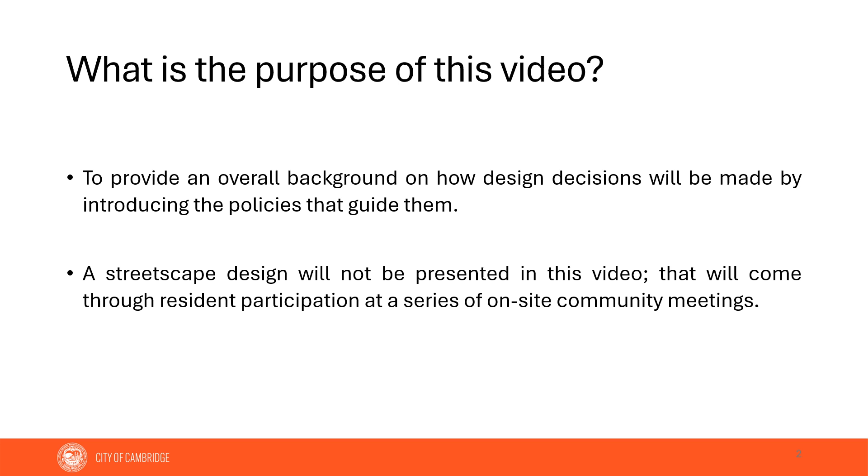What is the purpose of this video? To provide an overall background on how design decisions will be made by introducing the policies that guide them. A streetscape design will not be presented in this video. That will come through resident participation at a series of on-site community meetings.

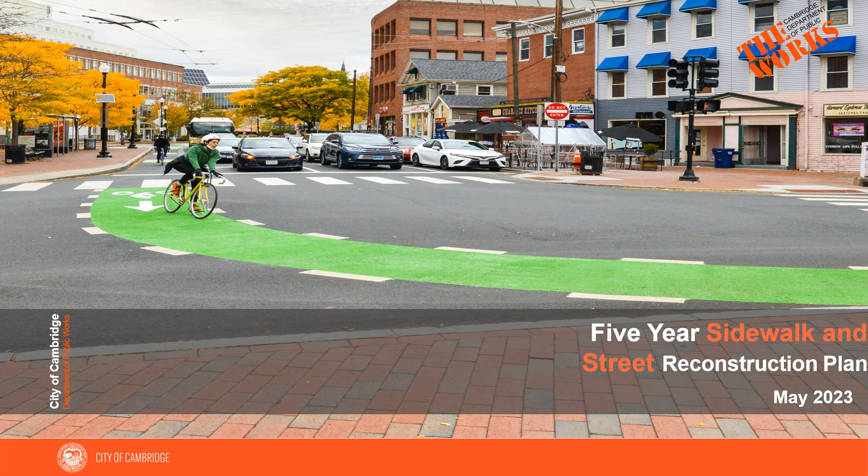The 5-year plan is a comprehensive plan for designing streets that safely accommodates all users, pedestrians, cyclists, motorists, and public transportation users of all ages and abilities. The plan is developed with many priorities in mind: existing street and sidewalk conditions, proximity to things such as, but not limited to, parks, major squares, senior centers, and schools.

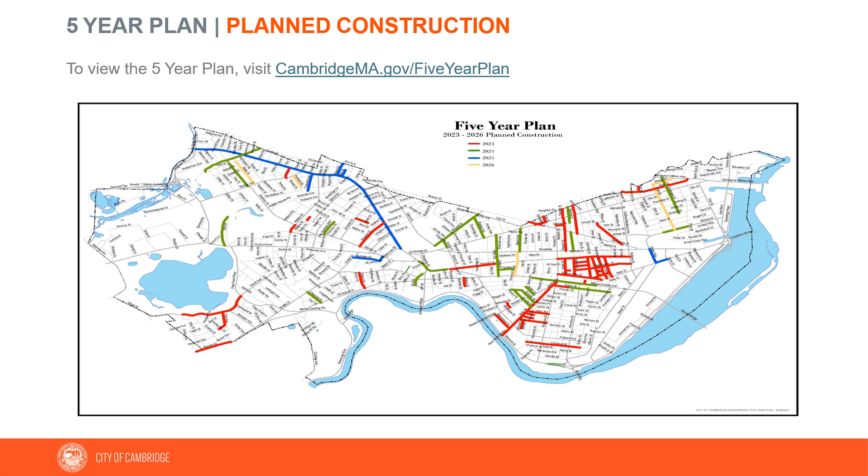This slide depicts the most recent map of planned construction under the 5-year plan. To view the 5-year plan, visit cambridgema.gov/5-year plan. The City Council adopted a Complete Streets policy in 2016. Complete Streets is an approach to planning, designing, building, operating, and maintaining streets that enables safe access for all users who need them.

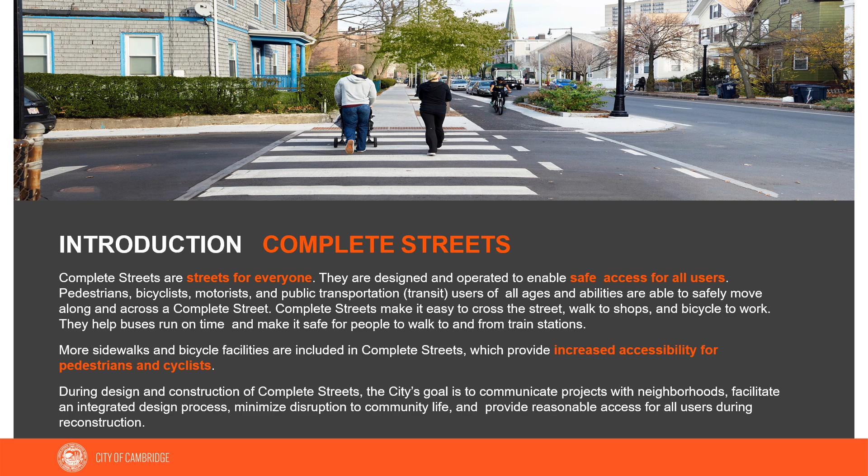Vision Zero is another important policy adopted by the City Council in 2016. Vision Zero recognizes people make mistakes, so policy and design should ensure those mistakes do not result in fatalities. As part of this effort, the City of Cambridge has reduced speeds on most streets to 20 miles per hour. To view the Vision Zero policy, visit

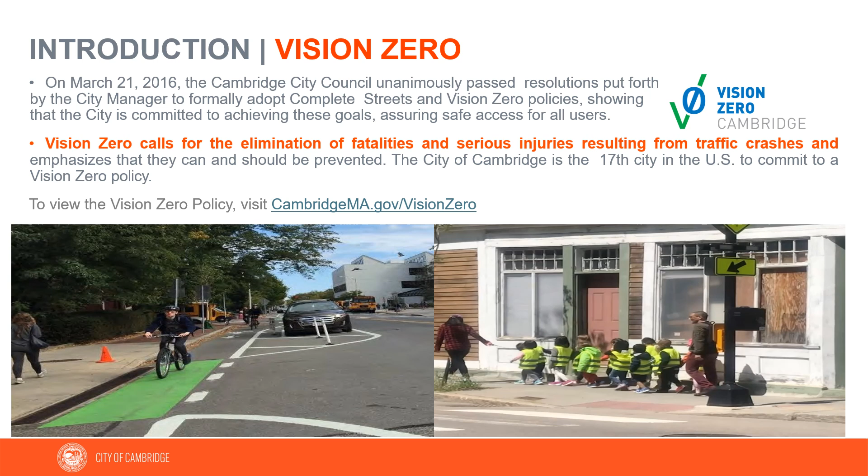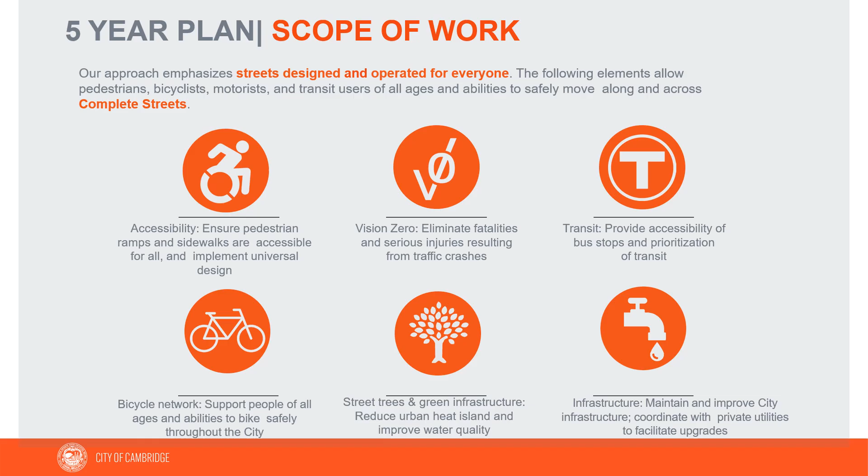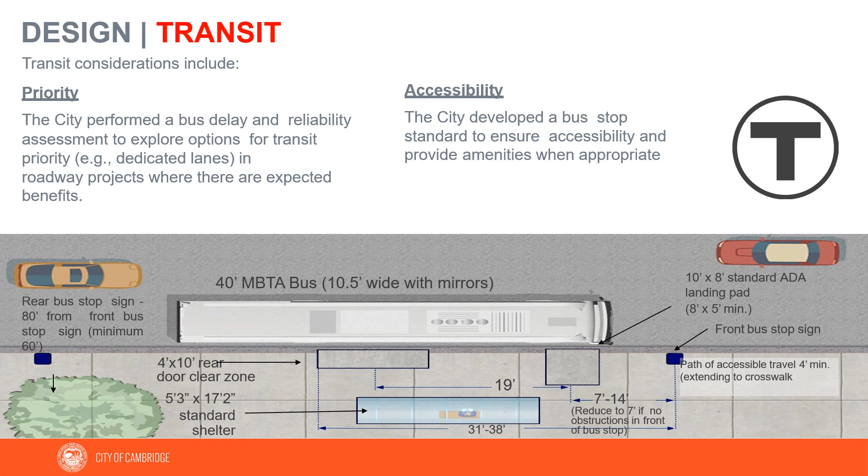cambridgema.gov/Vision Zero. The elements shown on this slide are utilized by engineers, designers, and planners to achieve the goals of the policies adopted by the City Council. The Cambridge Growth Policy and Vehicle Trip Reduction Ordinance places an emphasis on sustainable modes of transportation to promote livability, improve air quality, and reduce gas emissions. Bus stop design must follow MBTA standards to ensure access to the bus by people of all abilities.

The Cycling Safety Ordinance, or CSO, is intended to provide bicyclists of all ages a comfortable space to ride. Separated bike lanes have buffer space and physical barriers between the bike lane and parked and moving cars. Bike use is growing rapidly in Cambridge, and we are adapting our streets so that cyclists are as welcome as motor vehicles. To view the Cycling Safety Ordinance, visit cambridgema.gov/Cycling Safety Ordinance.

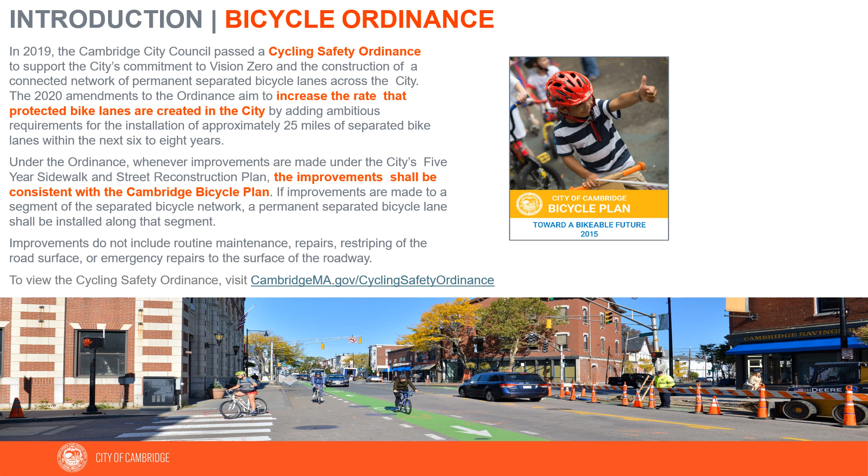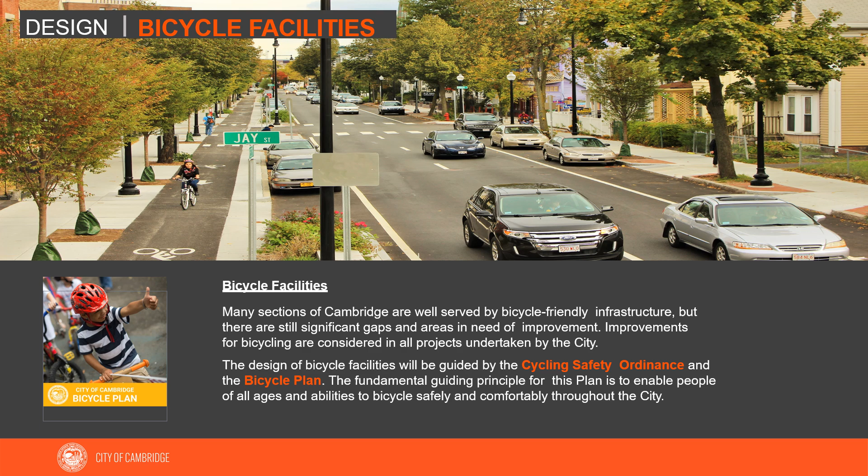The CSO directive, guided by the vision of the city's bicycle plan, informs roadway infrastructure projects in Cambridge. We strive to make the streets safe and comfortable for people of all ages and abilities. All these policies and plans provide a basis for our design process in a general sense. We then work with residents on detailed design options for specific projects, as each project is very different in terms of their opportunities and constraints. We take all this information, in addition to input from the community, and develop a scope of work for improvements.

How do all these plans and policies translate to specific street and sidewalk designs? Starting with accessibility. Why is accessibility important? Number one, it's the law. Both federal and state regulations cover the construction of sidewalks and require newly constructed sidewalks to be accessible. And number two, and more importantly, it's the right thing to do. We want our sidewalks to be as inviting and usable as they can be for people of all ages and abilities. People using wheelchairs, walkers, or pushing strollers.

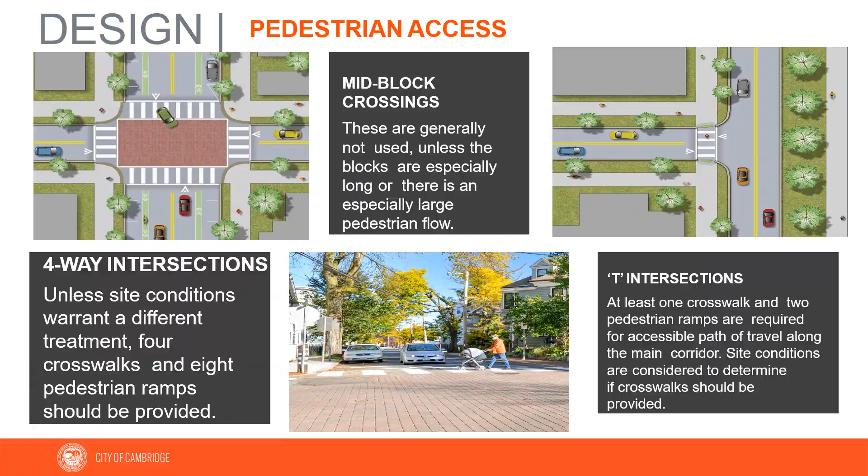As sidewalks are being redesigned, the team needs to identify and address existing deficiencies in the layout. Federal ADA regulations require that at existing pinch points, such as at street trees, hydrants, utility poles, the city is required to provide 36-inch minimum compliant sidewalk clearance between these fixtures and the back of sidewalk. In locations where achieving this minimum clearance is not attainable, the city may be required to construct a new 48-inch compliant sidewalk around this obstruction. This is achieved by constructing a bump out around the obstruction and into the roadway.

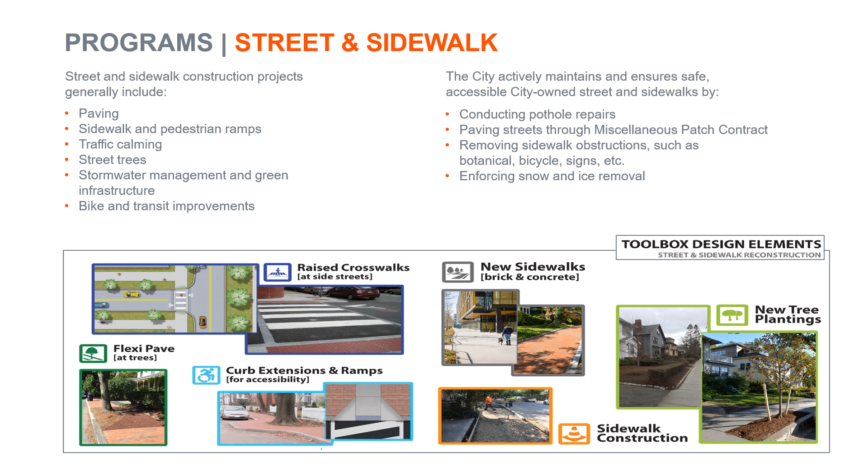Curb extensions have many benefits, including reducing the crossing distance, improved accessibility, preventing vehicles from parking within 20 feet of the intersection, all of which improve the visibility of both pedestrians and drivers.

The Cambridge Climate Plan and recently completed Urban Forest Master Plan document Cambridge's commitment to maintaining a healthy environment in the face of a changing climate. These plans include specific steps we can take to slow down climate change by lowering greenhouse gas emissions and helping us reduce impacts of climate change by, for example, providing increased tree canopy to reduce impacts of increasing heat waves.

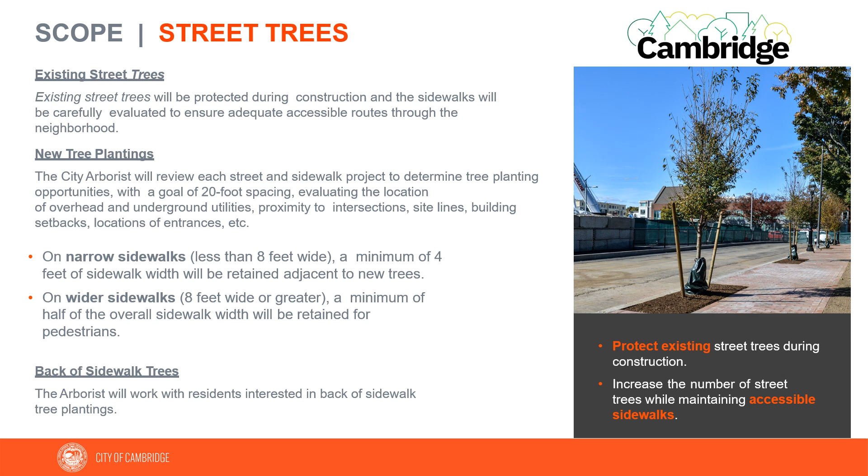Green infrastructure, or GI, is part of Cambridge's efforts to improve the quality of stormwater before it is discharged from the local drain system into the Charles River or Alewife Brook. GI refers to a variety of techniques which use natural processes, such as specifically selected plants and soils, to promote infiltration of stormwater into the ground, or to remove pollutants such as phosphorus from stormwater.

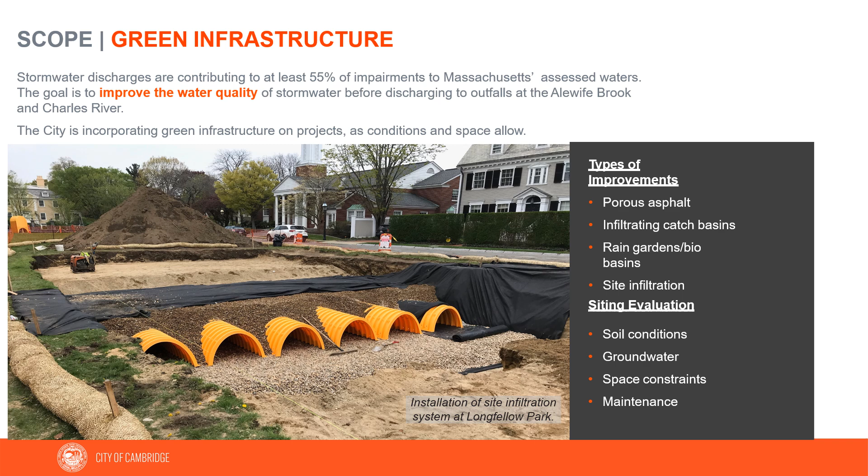The city has successfully implemented GI on a variety of roadway projects, ranging from major corridors like Western Avenue to residential side streets in West Cambridge. We are committed to incorporating these types of environmental improvements into smaller projects as conditions and space allow.

We are starting a community process to gather ideas, information, and feedback. Please take this brief survey to tell us about your experience on Avon Hill Street and Hillside Ave. We will consider all feedback, not just survey responses.